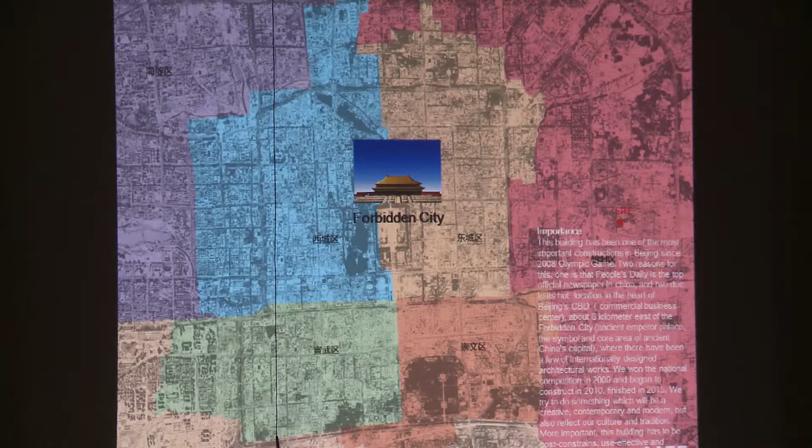People just can't avoid talking about that, because as the president said, this is a Western-style new city. But just last year, the government decided Beijing should not develop like that, so we have another capital about 100 kilometers away from Beijing, now just beginning construction. So we've learned our lesson - this is our inner city, surrounded by all the high rises.

This may not be very good, but it happened like that. This is the city, this is a new road just in the center, about 600 meters away here.

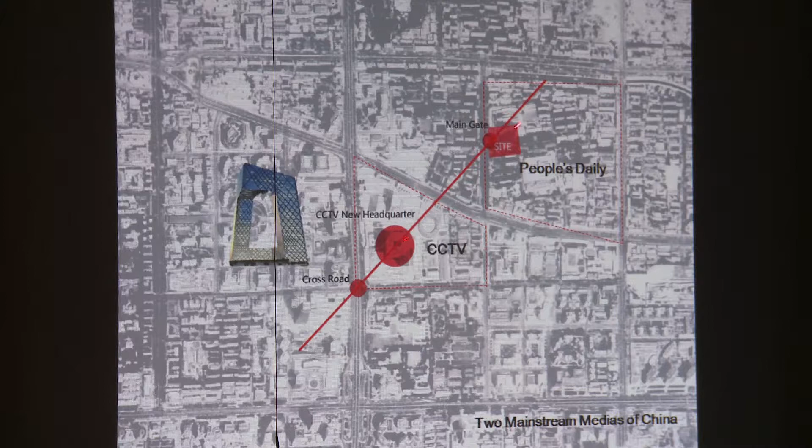You see this texture - actually, about 70 years ago, nothing was here. Since the People's Republic of China was established, this became a campus. The Soviet Union architects helped us build a campus - this was a mechanical engineering campus, like this.

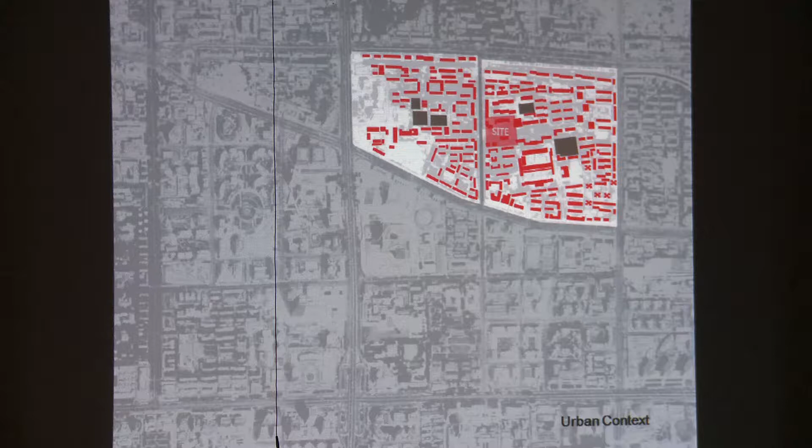About 20 years ago, the university shut down and moved somewhere else. So this whole area became the site for the headquarters of the People's Daily - a very huge one, with about 10,000 people working here full-time, just for one newspaper headquarters. You can imagine how big they are.

Okay, this is the site. So you see the existing patterns before, just like parallel lines. Why like that? Yesterday I talked to Thomas - he said Chinese people always like facing south, they don't want to live facing east or west. But it's not quite true - it's that facing south gets the most sunshine. So the pattern is like that.

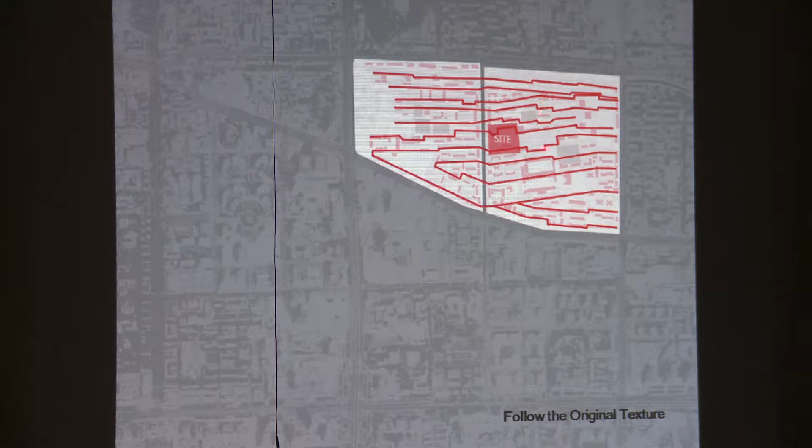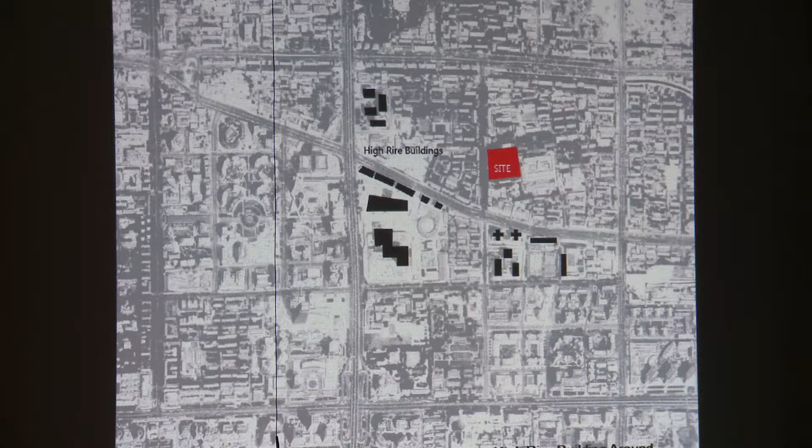So you see again, this is the CCTV tower, very huge - I mean the size. See the existing surroundings before Rem Koolhaas came here and won the competition - all small scale buildings. This one is really huge. It brought a lot of controversy, which we still discuss in China today, but I won't talk about that.

Okay, these are my ideas for this site. I tried to do something round shape, because in China, round means we have a very good relationship with any part - it's not very tough like a square shape. So I have lots of sketches. Before doing that, we won the competition with some ideas, coming out with round shapes, just like Taiji, yin yang, something like that.

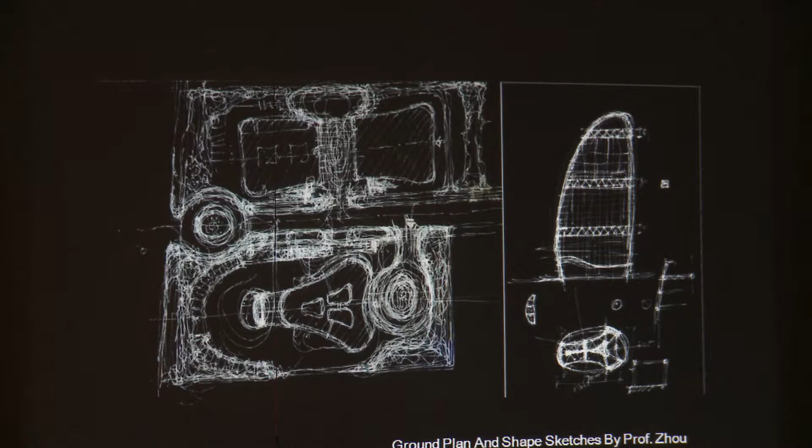Okay, there's something happened like people were wondering, this is a tower. Why did the tower become angled here?

Actually, before I do the design, see my sketch, it has a very good relationship to the street. Why did it happen like this? Because some story happened. There are two small buildings here and the people did not want to go. Then they asked us so much money, saying if you pay me I can go. So when we began construction on this building, I said to the owner, the top leader, the number one person, we can shift, we can turn around a little bit and avoid these small buildings. He said, how can you do that? This is a huge building. How can you adjust the relation to the street?

I said, no problem, because it's a round shape. Doesn't matter, we can turn at any angle like that. So then last year, about 15 months ago, finally the building was torn down. The people were satisfied, got money, and went away. So then we did the second phase, the underground parking here.

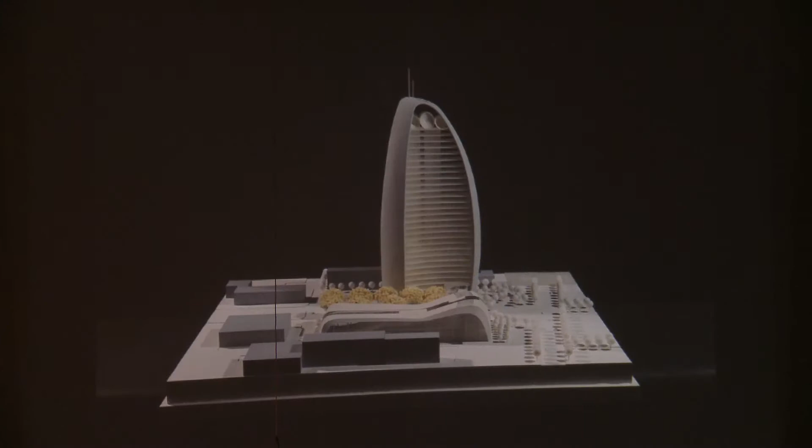Okay, this is when we won the competition, in the models. Actually, after the competition, we had a lot of changes. I'll show you very quickly.

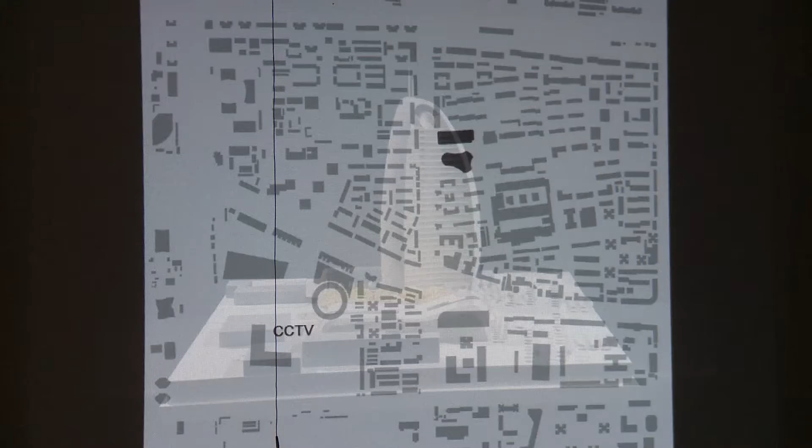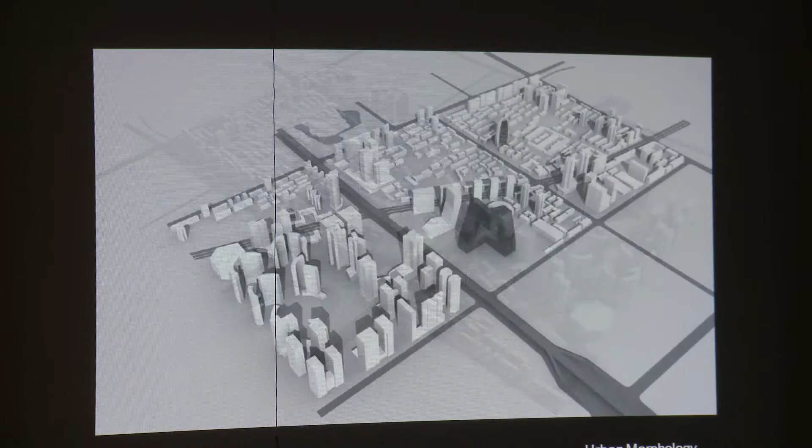Okay, this is when we did the competition, we researched the surroundings, tried to find some relationship in the surroundings, at different angles. Okay, this is what the shape came out to, the form. Basically it's a square, it's a circle, and it becomes a sphere.

And I just used the computer program. Actually, the computer program is very easy and simple. This is SketchUp and AutoCAD, only two tools we use, no more else. Then just stretch out, and we take some sphere surface, 3D surface, to cut it. But any kind of sphere surface can be controlled by the center and diameters. So it's very rational, it's not just randomly forming the shape. So finally, we got this form.

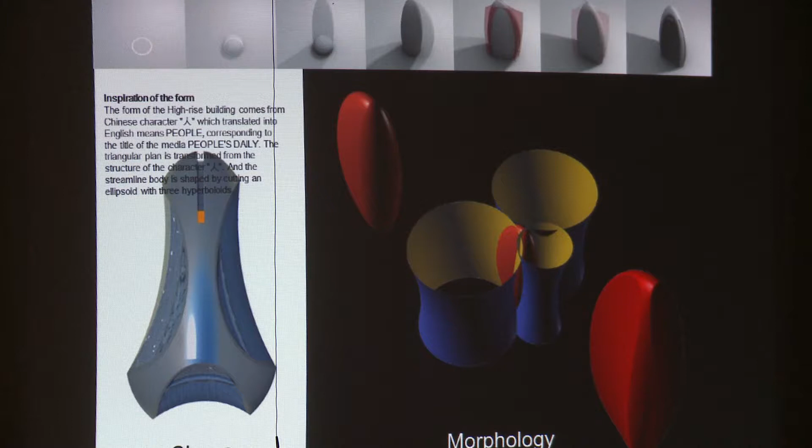Okay, and we did a lot of models like this. For physical models, only a few of them, 5 or 6. But for computer models, we got thousands. Why do we have to do that? Because we try to make everything perfect, the form itself, and also considering the structure, because Beijing is a severe earthquake area. So you have to be very careful about wind loads, vertical loads, and horizontal earthquake loads. And the main things concentrate on the shape and the forms. So we did 1,000 models like this.

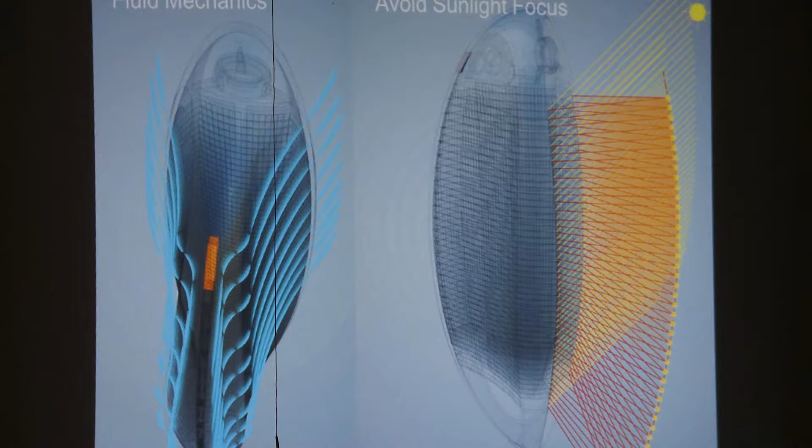Good chance for us, because when we won the competition and began construction, we had 2 years actually. So the first year was almost all conceptual design, to adjust that. For the construction documents, we only wanted to take like 9 months. So we had time to do something a little bit slower. Everybody knows in China everything happens so quickly, but for this building, from competition to finish, almost 8 years. So the timing was okay.

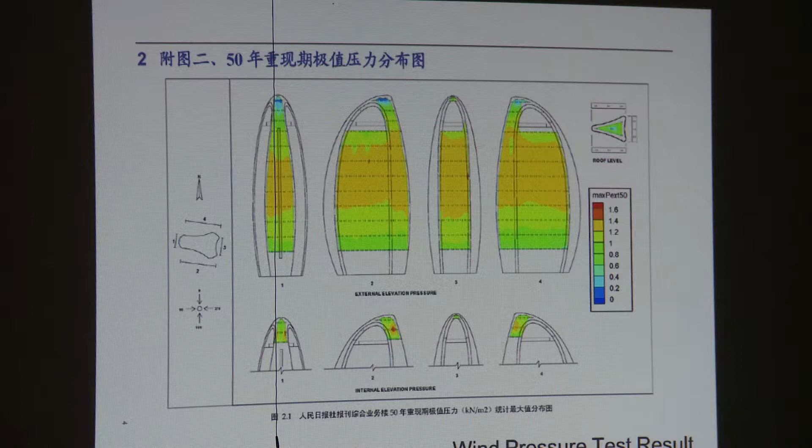Okay, this is some structure analysis, I'll go through it very quickly. This is a core in the center, and there's a triangle shape. It's good for the vertical and the horizontal loads.

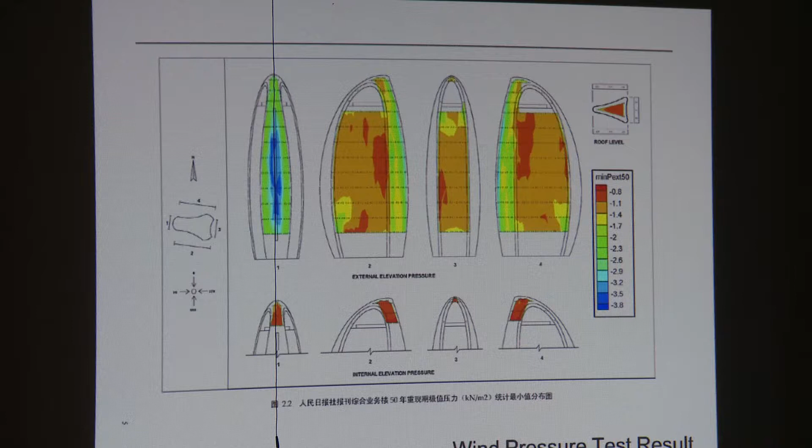Inside, the prefabricated steel structure. This is not the top, it's a top. This one is huge, from this to here it's about 50 meters. It's huge, so it's like a stadium, like an indoor stadium.

So when construction began at the top, it was really tough, so we had to do everything in detail. Its shape is complicated, but every single point can be decided, not randomly decided, it can be decided by diameters and the center. So actually it's quite a rational shape and form.

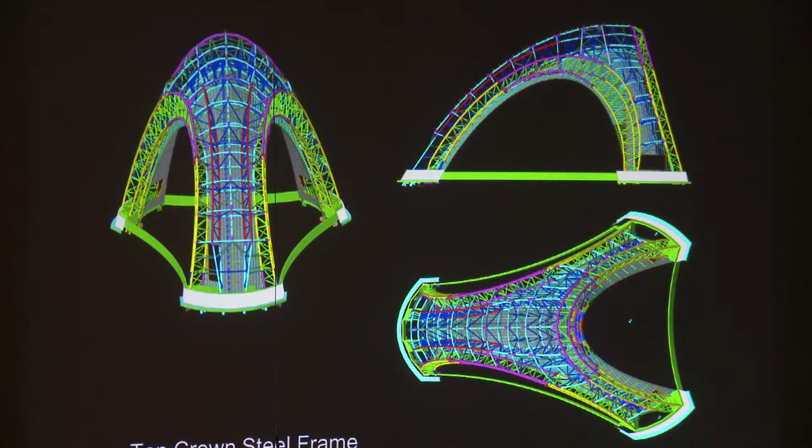Okay, this is a central corridor, that's the elevator and the infrastructure, the vertical transportation here. And pay attention to here, notice here, this is 3 legs always going down, all the way down. But here there are lots of vertical holes. We put ventilation, we bring the fresh air here, but when the building was finished, there were some very serious problems.

Especially during the winter time, Beijing is very cold. So the wind goes all the way up and all the way down, and the hot temperature goes up. So here the wind speed is very, very fast.

People asked me why there's wind here, because there's no hole at all, we just sealed everything. So when we calculated, the whole tower has been heated by air conditioning. People found the top of the building very hot, but the lower part became cooling. So we had to do something.

After the building finished, the second year—the first year, the first winter, we got a lot of problems. Second year, we sealed it every four floors. Now it's become okay. That's something we didn't expect to happen.

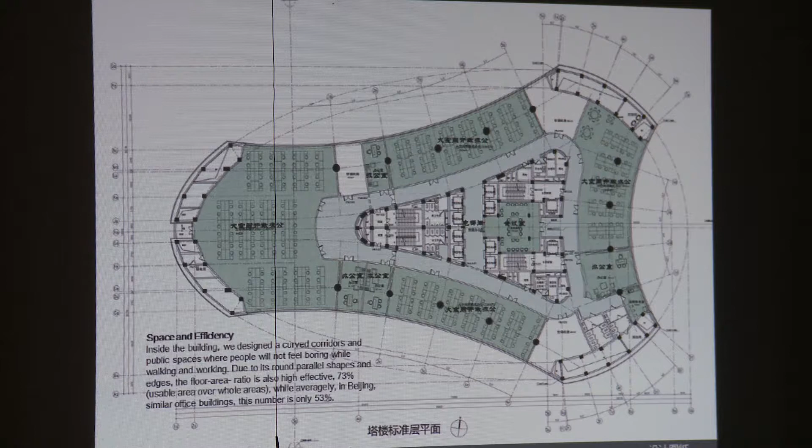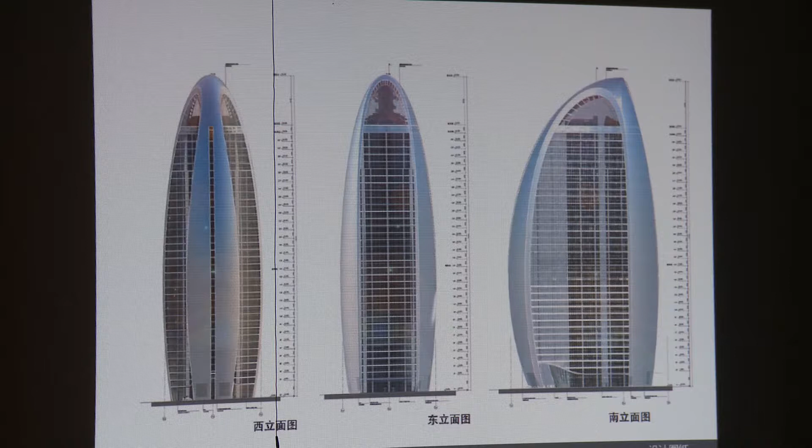There's no single component that is 3D. All the components could be 2D, merged or integrated as 3D. This is an elevation.

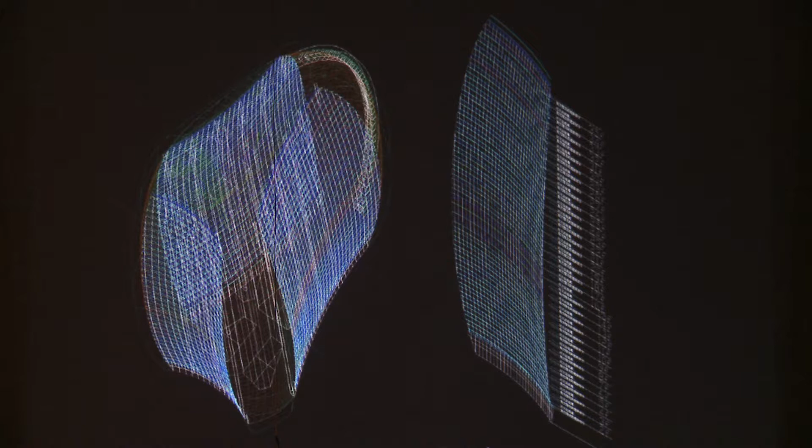To see the glass, the windows are on the small changed area of the building, and the radical change is on the three legs.

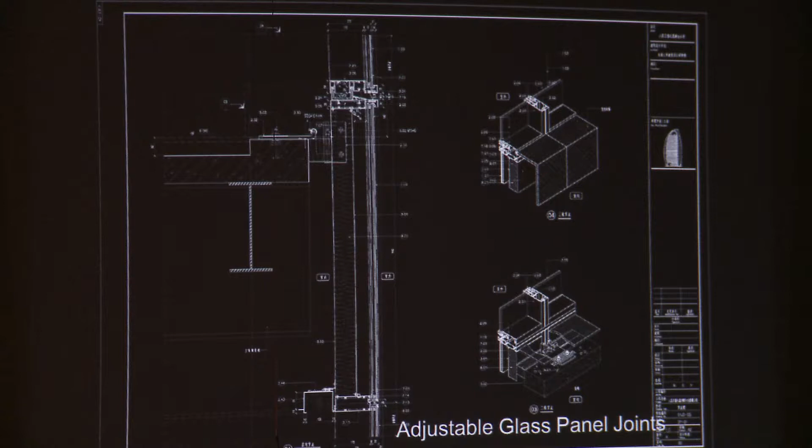Some detailing joints. One thing is that in China, lots of architects practice here, but we don't have any special firm to consult for us. So almost everything is done by our design institute.

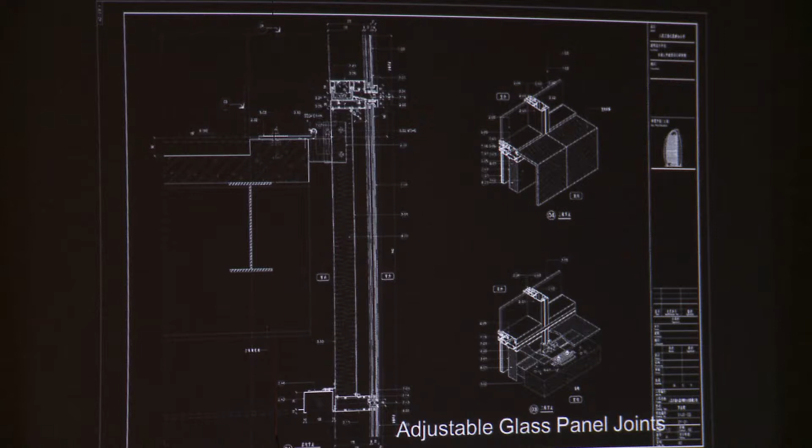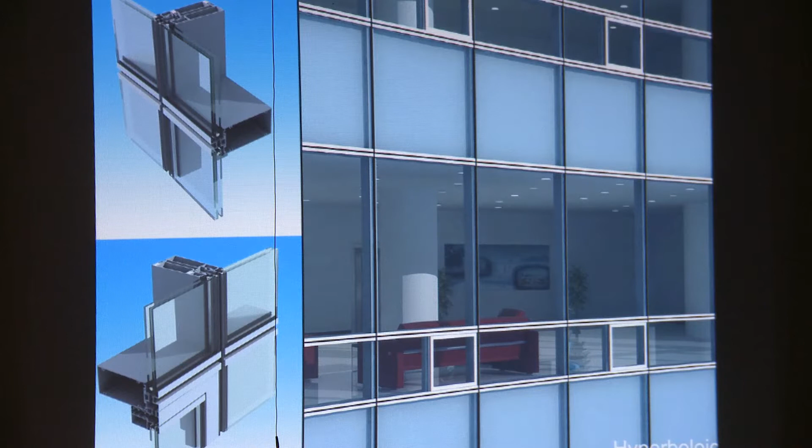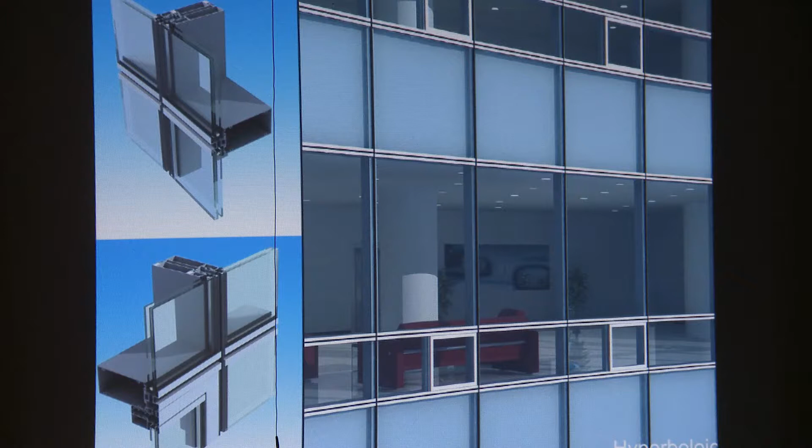I will show you some. This is a 3D facade for the window, but it's 1.5 meters wide and almost 2.4 meters tall. This is 2D, so just a gradual change, and finally it seems to form a curved facade.

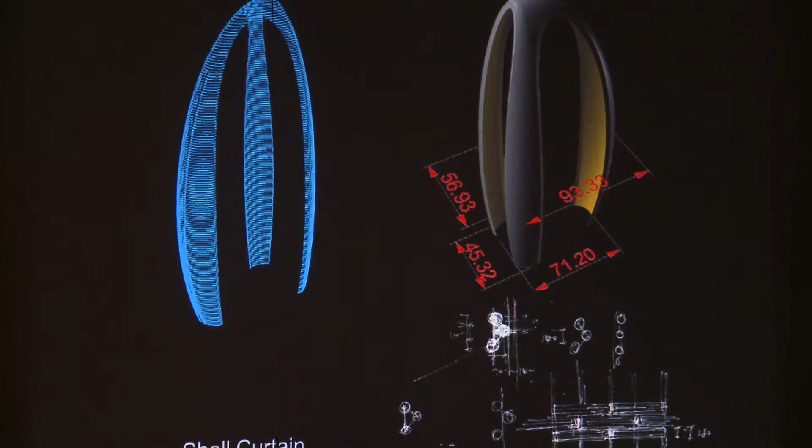This shell changed radically, so we used the baguettes to imitate this. But in the center is a window. I did a lot of sketches to work out some details. So the facade coming from here actually—

At the very beginning, when we won the competition, our preliminary design was to use metal sheets to cover the 3D facade. But there's one serious thing—the air pollution is very severe in Beijing. We wish it will come better, but at that time it was not good. So if we did a 3D curved shape, the dust and pollution would make the building look very, very bad. So in China, traditionally, the roof of the tower is glazed terracotta.

It never needs people to clean it, never. And when the rain comes, it becomes clean. Also, it lasts a long time, like 600 years. You never have to worry about it decaying or changing color, no.

So then we made a lot of studies—how to size the terracotta, how to organize it, how to fix it to the building, and how to prevent it from crushing down, because in winter the temperature may go down to -20 degrees, but in summer, sometimes the top surface of the building can reach 60 degrees. So the temperature difference is 80 degrees. We have to make sure it's okay.

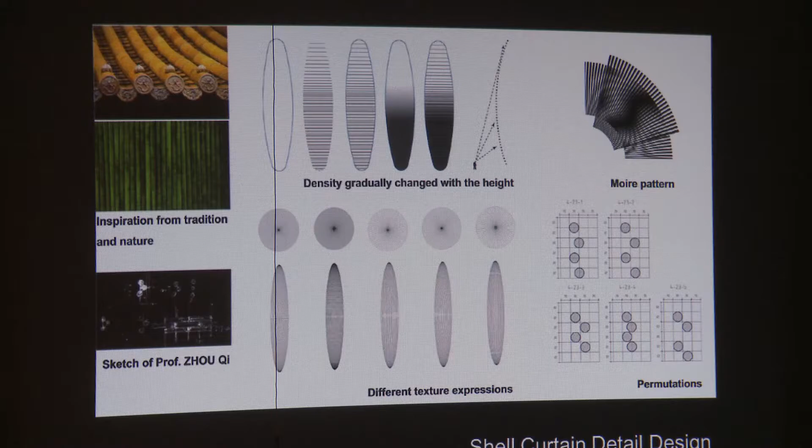So we did a lot of tests in the factory and at the university lab to make sure it's safe. The terracotta has now been on the facade for almost 4 years, and nothing has happened so far, so that's good. We made some models to test this. Also, it's good for summer, cooling down the building, because there's a space of about 1 meter, so it provides shading.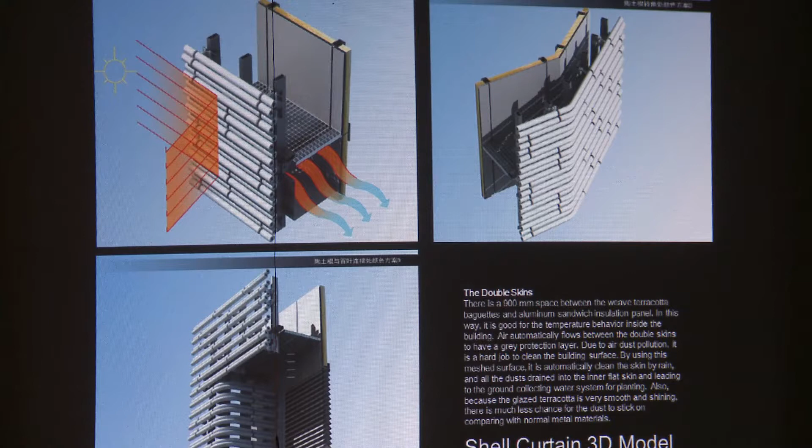And in wintertime, maybe it can store some warm air here. So let's go very quickly.

We have some lighting, only for decoration, put here on the outside, casting on the metal sheets. That's the golden metal, because Chinese people prefer gold - it's a rich symbol. So when the lighting casts here and reflects through the space of the terracotta, it becomes like a lantern.

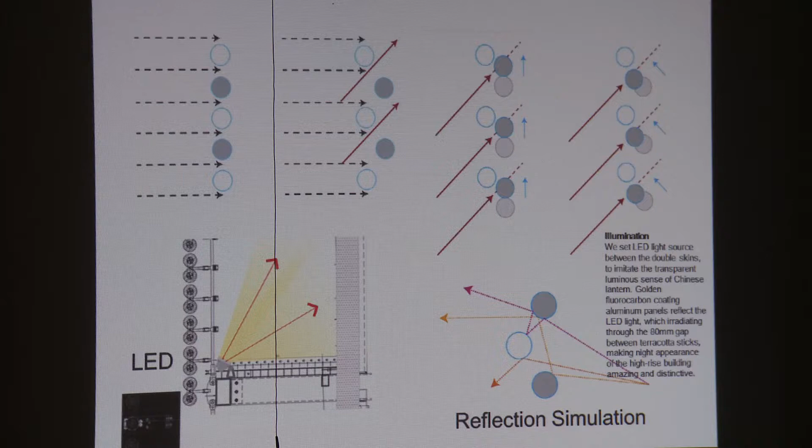We tried to compare the color, and finally I found one color when I visited the Mercedes-Benz showroom. The seller told me this color can work anywhere - in the desert, in the sunshine, in North America, in China, everywhere. So I said that's what I want, because the color can be like this silver color. Finally I just selected this one.

The combination is like a Chinese traditional craftsman technique - like the farmers use this kind of thing to hold goods, this weaving shape.

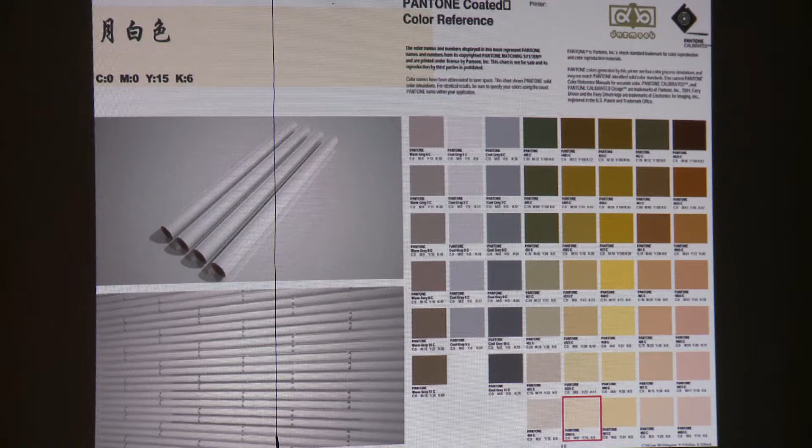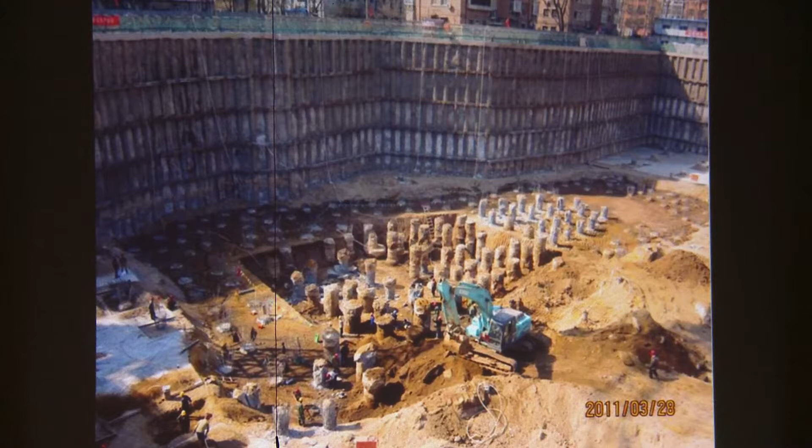Now I'll show you some images during the construction very quickly, all the steel structure. This is 3 stories underground. You can see lots of piles, all the way down to 70 meters deep to the rock.

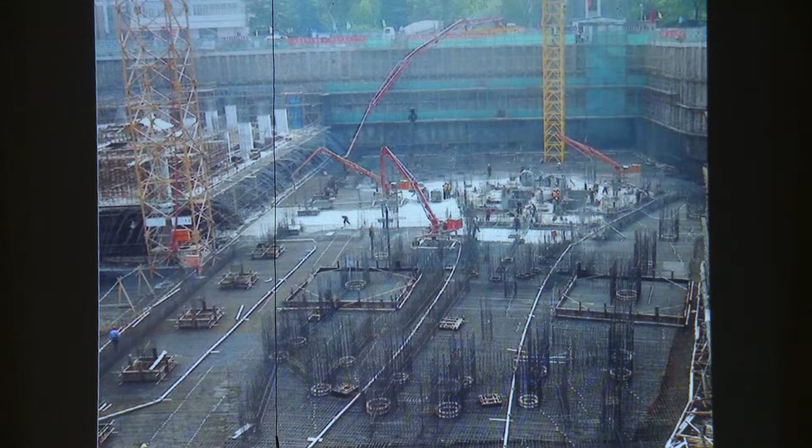Actually the construction speed and efficiency is very good in China. Now the building can go up 1 story per week, very fast, even though it's not standard components.

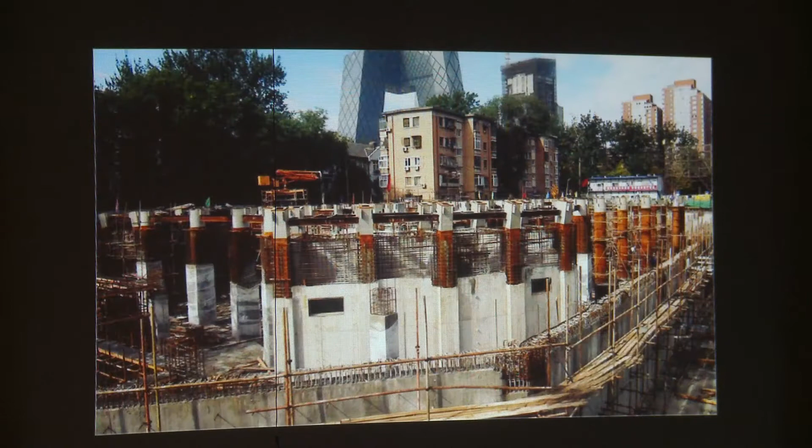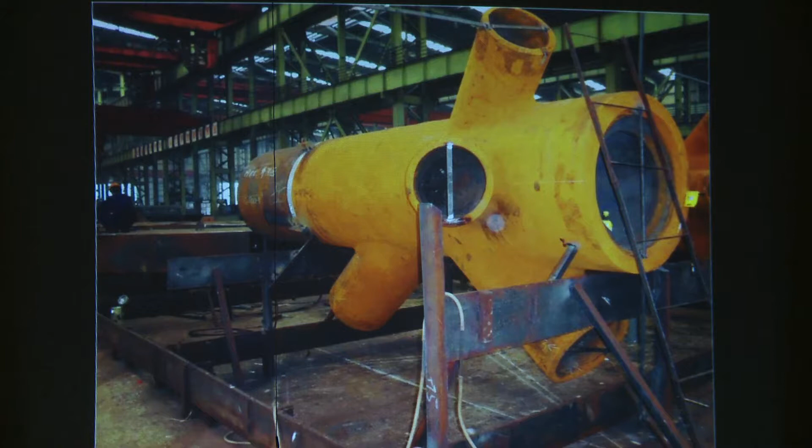All the steel structure was prefabricated away from Beijing - my hometown, about 120 kilometers away. All the components were shipped through the highway and transported onto the site. That's a huge component.

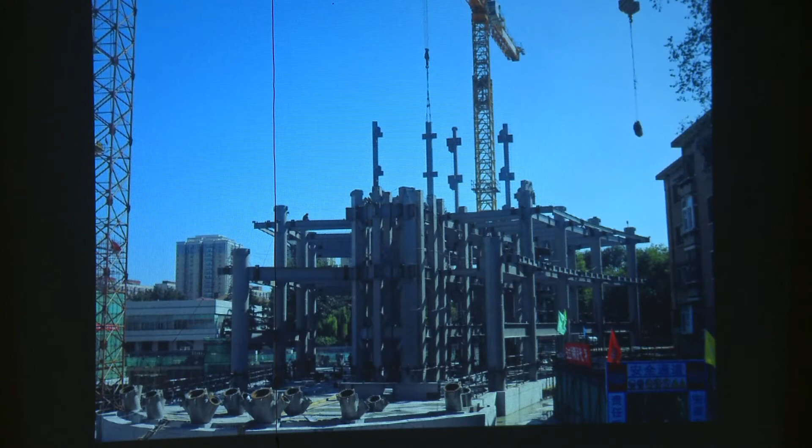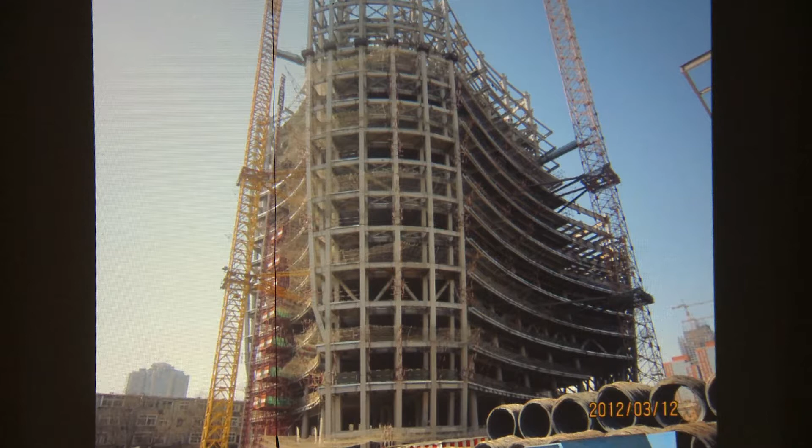This is the lag - between these frames there's a vertical hole all the way to the top. I just mentioned some problem here, it happens through here. This is the floor - those are traditional, conventional decks found everywhere in the world for high-rise buildings.

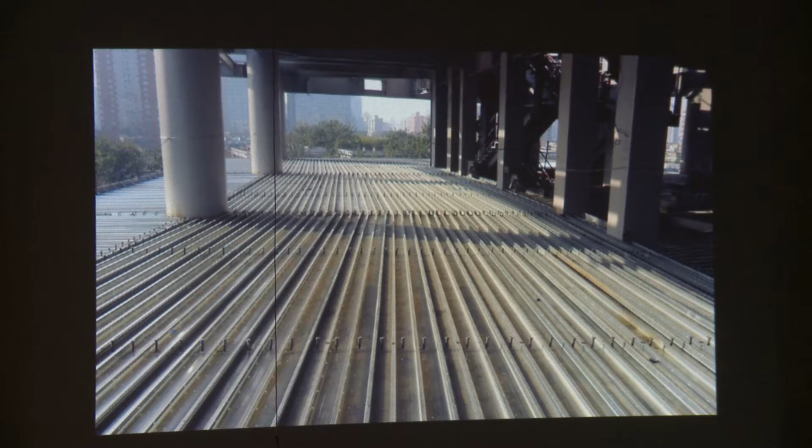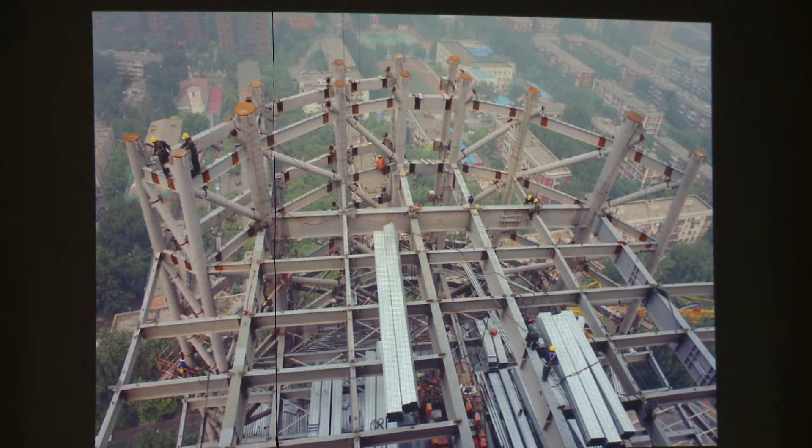This image brought some argument in the media, because when it came out as a structure, people said it looked like human bodies - I won't mention that here. Anyway, when they finished it, people said it's okay.

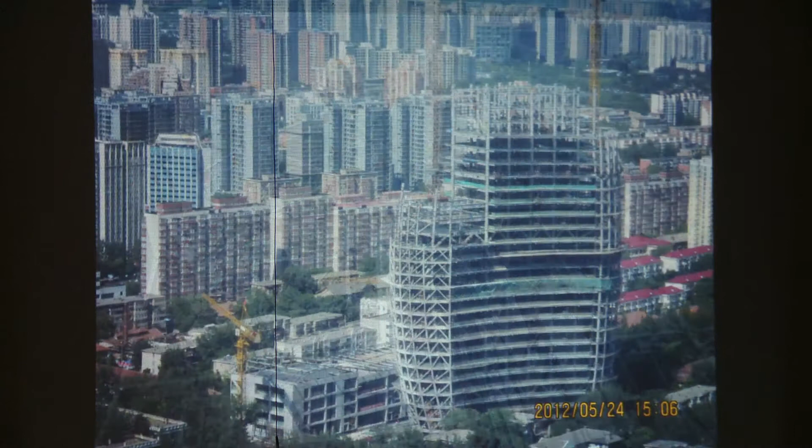Okay, this is the top. Let's just say about 40 meters wide - there's space there.

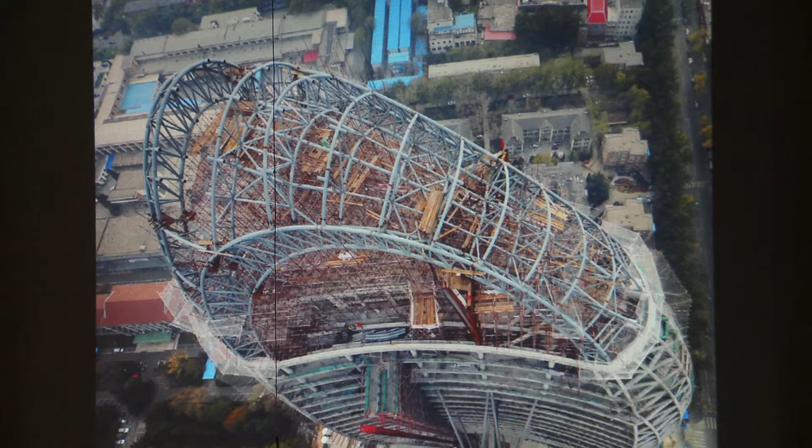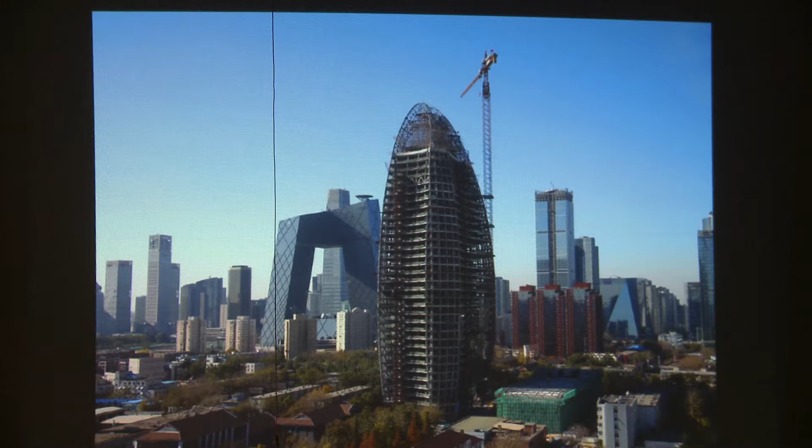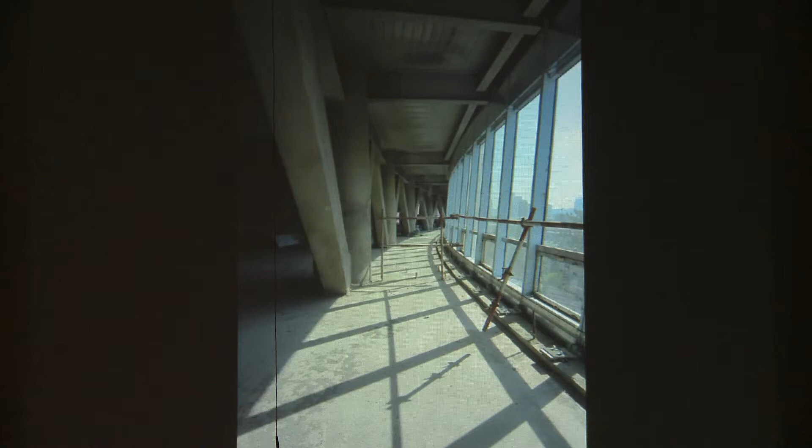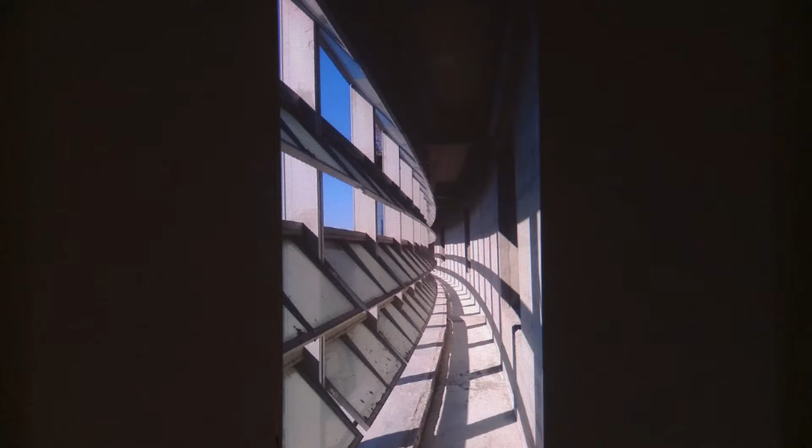That's the window sheet components. So the columns are placed sloped, but the windows are almost vertical. You can see the 3D facade with the 2D window panels.

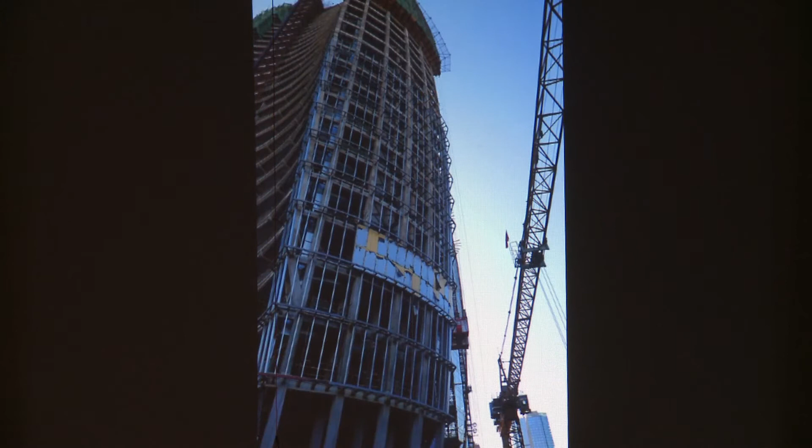This is for the terracotta - I put the golden aluminum panels here, and that's the insulation panels. But this one, every floor we use a structure to fix the baguettes.

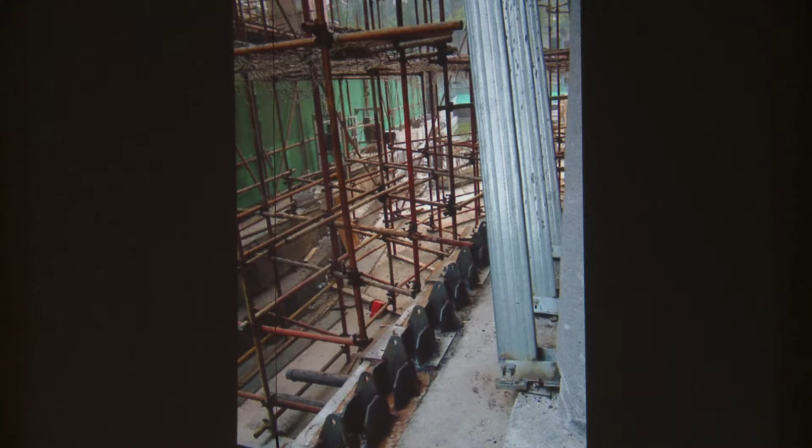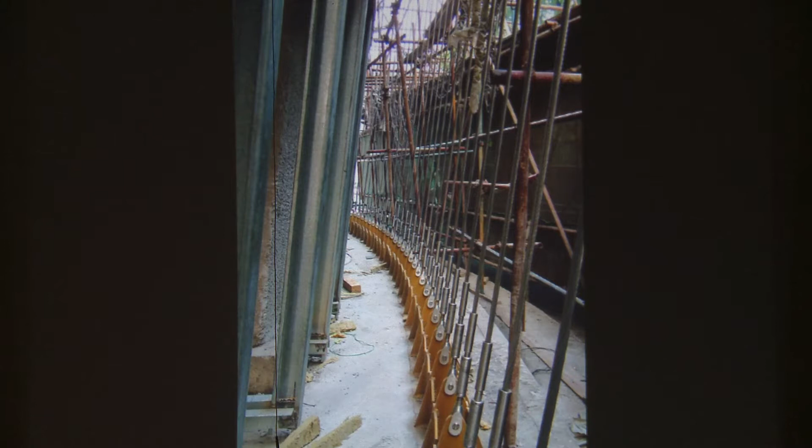This is the bottom of the ground. So we use a cable - very high strength cable - to fix the baguettes, see here. This is stainless steel, about 2.5 centimeters in diameter.

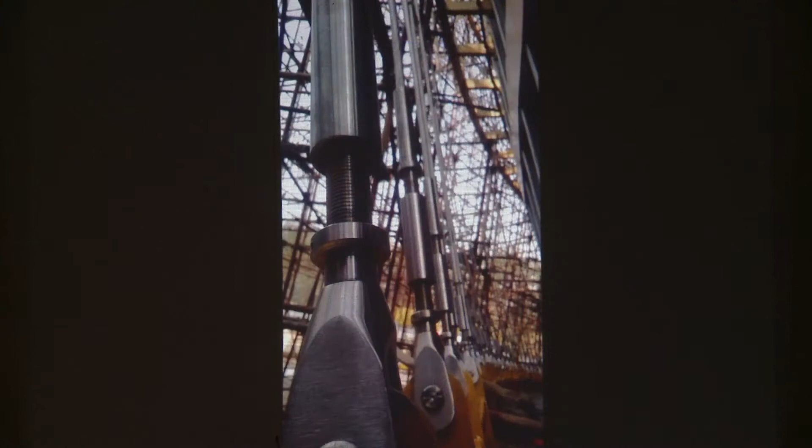We worked together with the factory to design every detail because it's exposed to outside - it will not be covered or hidden after the building is finished.

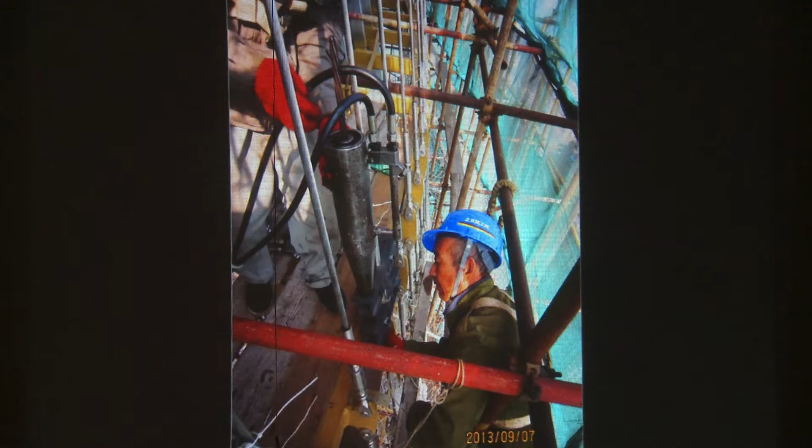This is mainly about labor, because each baguette changed a lot. Totally 220,000 baguettes, and there are roughly 5,000 different standards, lengths, and angles, because the baguettes, when joined together, are curved in the plane. So you have to cut the angle of the opening - it's really tough.

When the German company came to the competition to try to get the job done - NBK in Germany was the best terracotta factory - but when facing such huge numbers, they said: we can do that, but 5,000 standards, we cannot do that, we don't have such manpower. So finally the Chinese local factory won the project.

They hired 200 people who didn't have any skills, just to measure. This happened 8 years ago, but it would never happen in China again, because nowadays labor cost is so huge. We were lucky at that time to finish that - you cannot imagine it happening in the future.

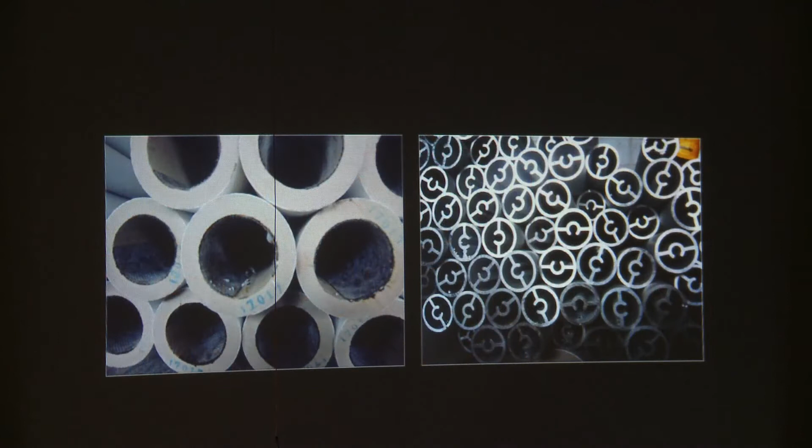So this is the detail we designed. This is a fixture, and the terracotta is fixed horizontally, with a cable structure. We tried to minimize the structural components behind the terracotta. Those components, the aluminum things in the middle, fix that, and also the aluminum bar goes all the way down here.

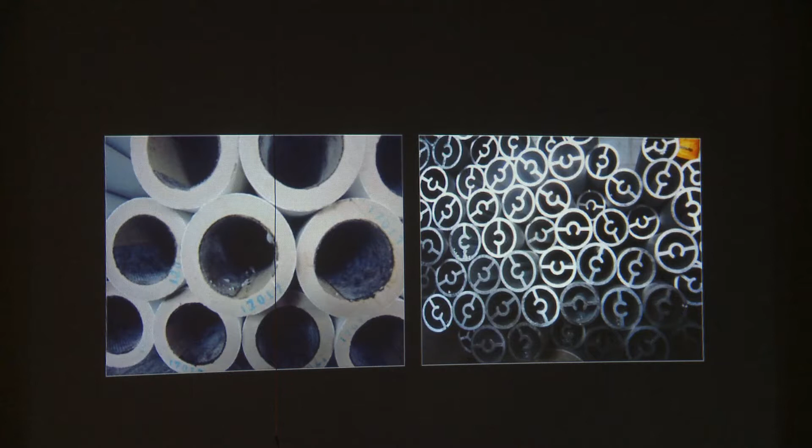Make sure if it's broken in the sky, it becomes broken pieces, but it will never become dust or components that harm people down below. The people in the factory measure every detail and install that. Imagine 220,000 pieces, and when things ship to the site, it's very tough to find which part is which. We work together with the factory and vendors to do that. It's very tough, but we can install it in the sky.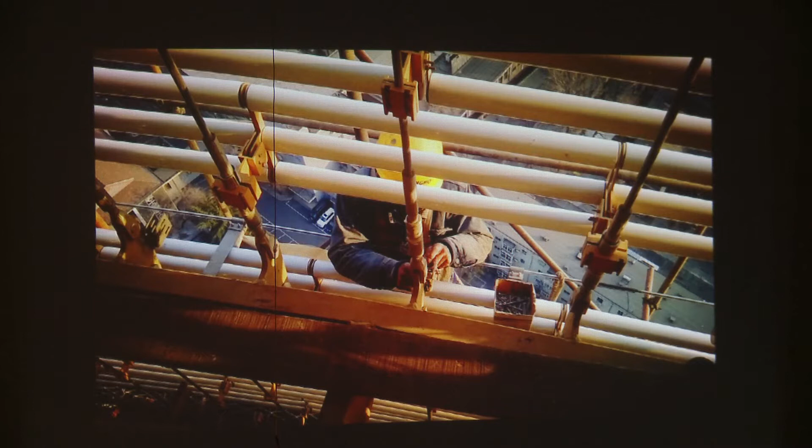Half finished here, already covered with almost gray and white. When the golden shows during sunshine, like morning time, the horizontal sunshine casts here, you can see the color of the gold, and it gradually becomes white. So throughout the daytime, summer and winter, they change color.

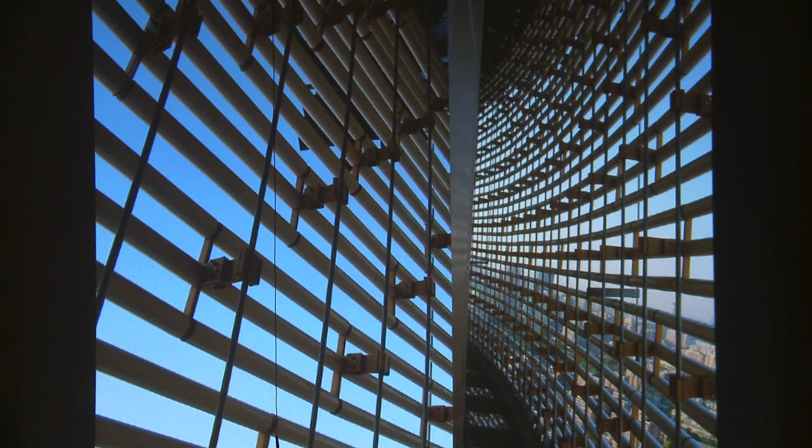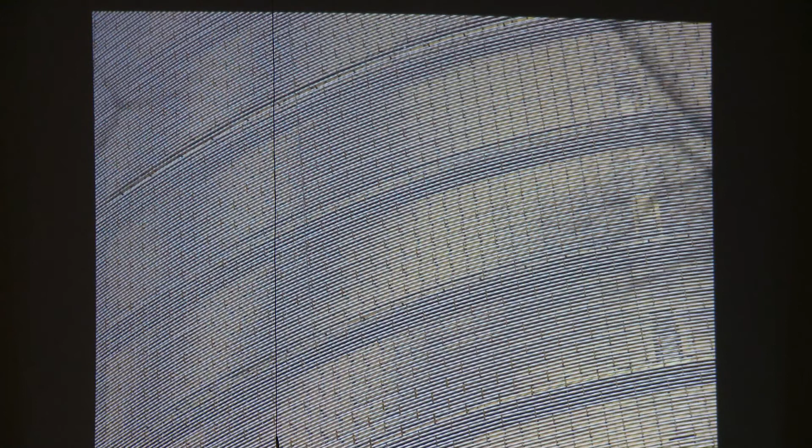So this is finished, we can see from the corridor. Also, one day if it needs to be cleaned, people can come up here manually to clean it, but I hope that will not happen. Since it finished 4 years ago, this has never been cleaned. This is the finished facade.

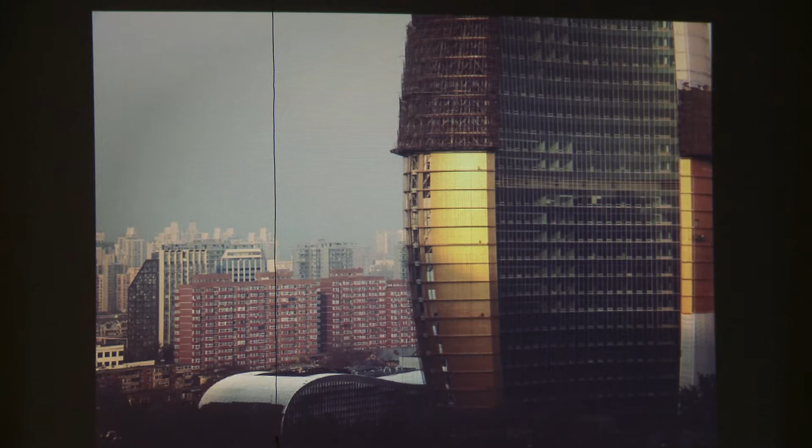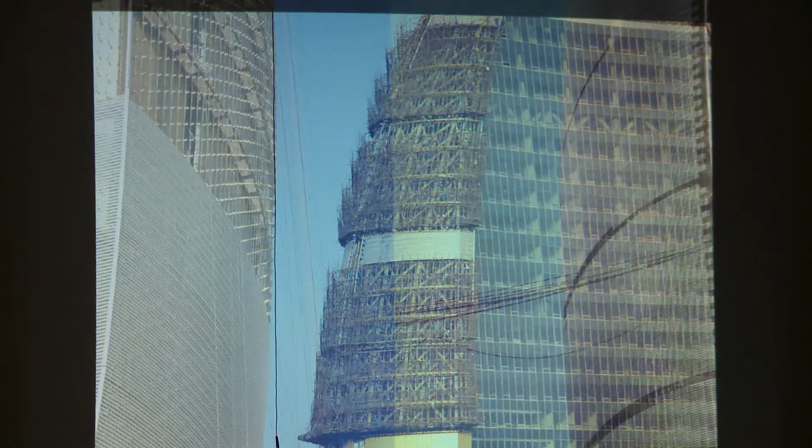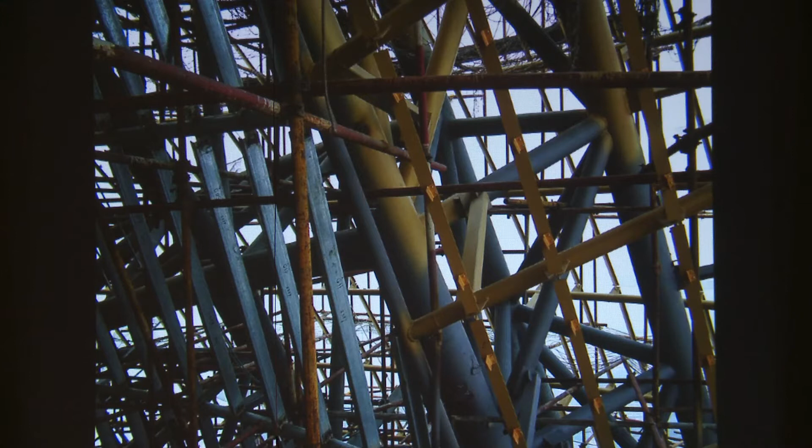When some part is not finished, it's like a hole. See here, that's the main elevation. This is the top during construction, with a lot of supporting structures here.

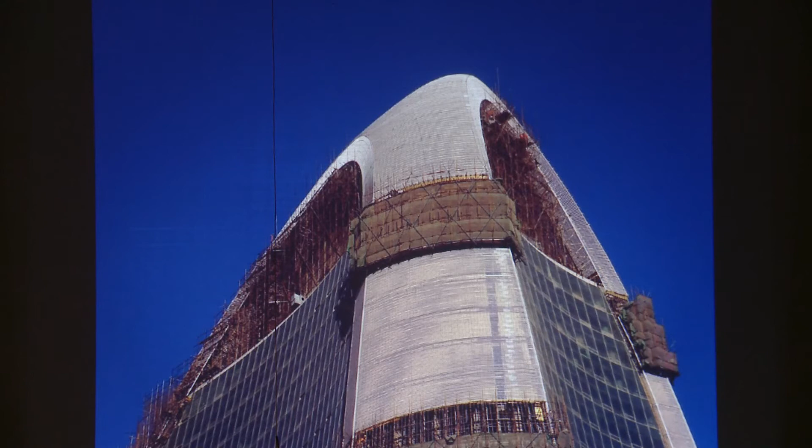Almost done, see. Those are joints. And I also put a golden painting here, it's really gold sand painting. During the nighttime, we put 24 high power casting lights, casting up, so it's like a sun during the nighttime.

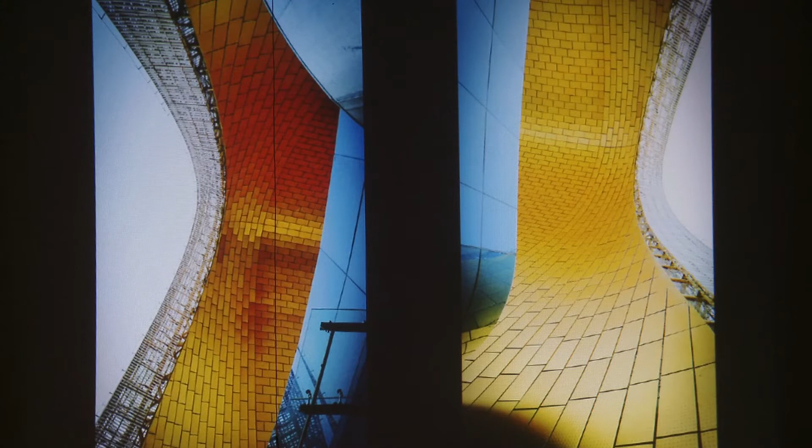This is the top of the roofing. This part only has golden exposed to outside, but because it's facing down, people cannot see it during the daytime. Only at nighttime when the lighting casts up does it become very bright here. This is almost finished.

I just mentioned every curve, every point can be rationally defined, so every corner, every detail looks good. This is another building, the auditorium, just attached here. You also see Chinese traditional glazed painting, it's a high temperature process, a traditional one, used as window shades.

During the nighttime, as I mentioned the lighting, because the LED power consumption is not big, when the light comes through we can change 1,000, 10,000 colors. During the party, July 1st, the Chinese Communist Party celebration, we use red. In summertime, because it's very hot, we use blue, something like that. See, I can change it. Some finishes go very fast.

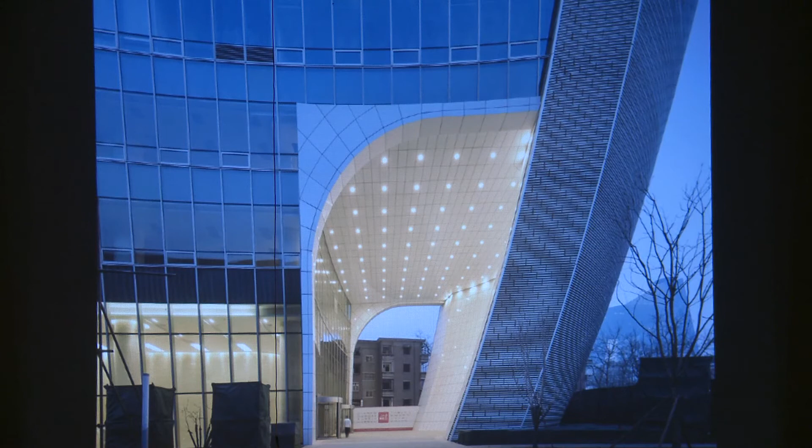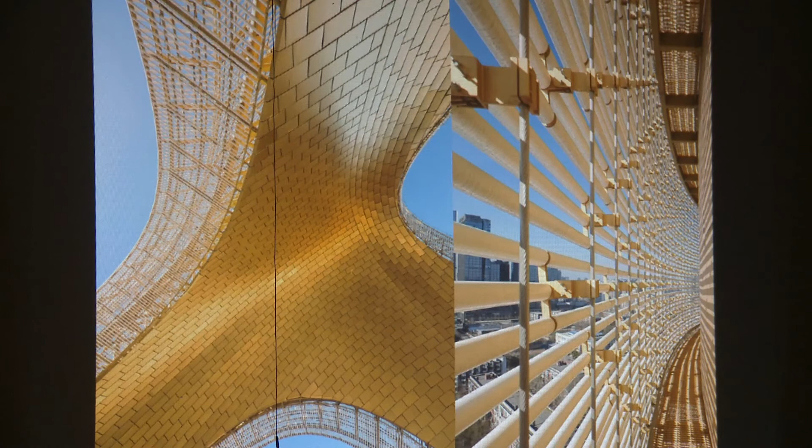We do everything: interior design, furniture design, landscape. This is one thing we controlled very well. This is the main entrance, and this is inside the entrance hall, including the lighting and everything we dedicated to doing. I told the owner they should not do any renovation again for the next 30 years, because all the materials last a long time. This is a little bit Chinese style, because this is the biggest hall, holding 1,000 people.

I think this is the only image referencing Chinese tradition, the ceiling, because people say this is quite a modern building. How can we see some tradition? I say terracotta is a traditional material. And this auditorium, yes, also - we did the acoustics too. Inside the main building it becomes very easy, just exposing the ceilings, everything, for the functional purpose.

You may ask me how much this building cost. Actually it's not very expensive, going back to 5 or 6 years ago. Let me tell you the exact numbers: per square meter it's about $1,000, including everything - furniture, interior, everything included. If you compare with CCTV, we only have 1/5 the cost per square meter.